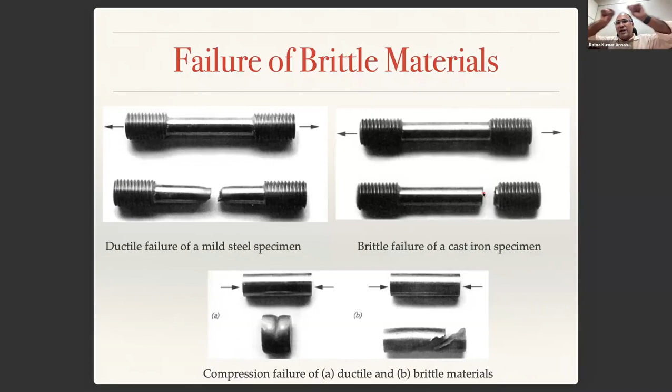That is why if you take a chalk piece — chalk is a brittle material — if you apply a load axially, it breaks normal to the surface. It may break at the center or any point depending on stress concentration; here it broke at a particular point. The idea is that it breaks normal to the surface. Why is it breaking normal to the surface?

Because on that plane you have maximum normal stress — that is the principal stress and the maximum normal stress along the x-axis. Since the normal to that plane is the x-axis, sigma along the x-axis is maximum there, and hence failure happens on that plane, because brittle materials are limited by their normal strength.

Similarly, in compression it behaves differently. We will talk about that later, but focus on this for now.

So we have to understand that brittle materials do not yield, they rather fracture. For brittle material, fracture in tension is only due to normal stress, because failure is completely governed by normal stress — whichever plane has maximum normal stress, that plane is going to break apart.

Because the critical stress is only the normal stress, we need to use the maximum normal stress theory. This theory says that wherever the maximum normal stress reaches the critical value — here the critical value is ultimate strength rather than yield strength — the maximum normal stress theory can be applied for brittle fracture in tension.

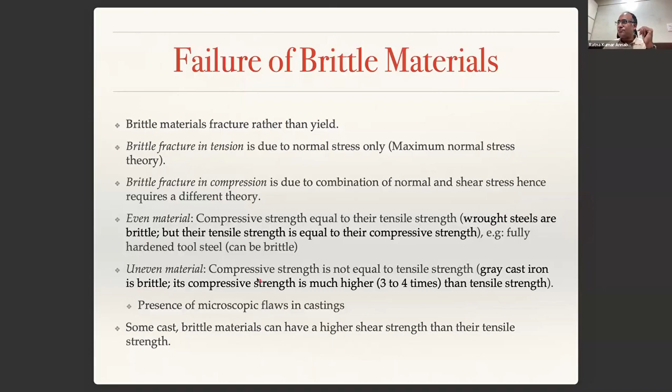This is because in castings you have several microscopic flaws that become fracture points. It's much easier to open up a crack under tension rather than under compression. That is why under compression they have much higher strength. Sometimes some metals also show uneven response in yielding, but let's not worry about that at this point.

Now, for a ductile material, instead of applying tension, if you apply torsion -- that means pure shear -- in the previous case with uniaxial tension, failure happened at an angle of 45 degrees. But with torsion, failure happens normal to the surface. Why would it happen normal to the surface? Because shear stress is maximum there. Since you are applying pure shear, your maximum shear stress is going to be in the same plane. That is why failure happens on the plane of maximum shear stress, because you are applying shear stress and the maximum shear stress is on that same plane.

But brittle materials are governed by their maximum normal stress. So if you apply torsion, the normal stress is going to be maximum at an angle of 45 degrees. If you draw the Mohr circle for pure shear, it will be centered on the origin of the sigma-tau plane, and the maximum normal stress will be at an angle of 90 degrees to the maximum shear stress -- that is 45 degrees in the physical plane. So the normal stress is maximum there, and that is why breakage happens at that angle if you take a brittle material and apply torsion.

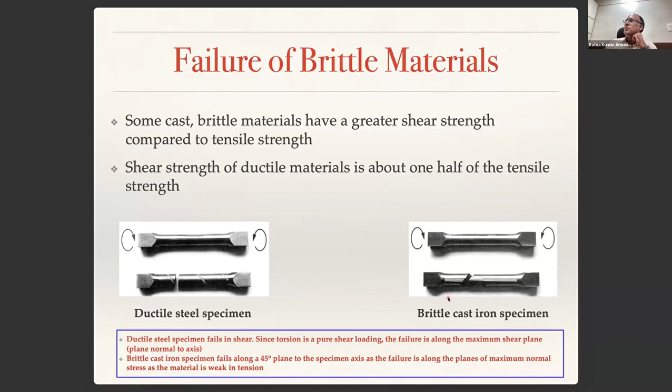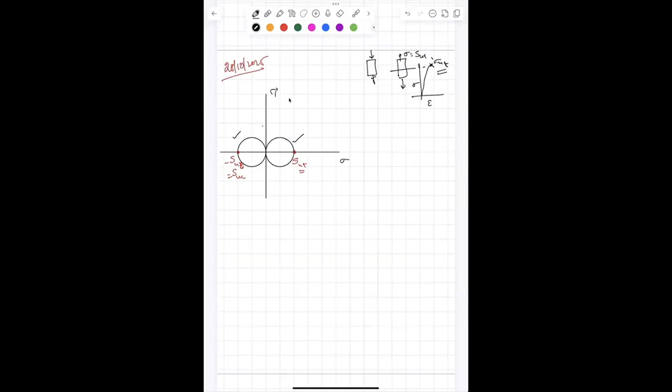Yes sir. Now if I draw a line tangential to these two circles, that is basically a failure line. So this failure line intersects this at tau I. So if I have to write, for an even material, the equation of this failure line, what do I write?

My equation for the failure line will be tau equals tau I, isn't it? When my tau becomes tau I, when my shear stress becomes tau I, that is when failure happens. That is the equation for the failure line. What is the meaning of that? Let us say I have applied on the body a stress of this much.

Sigma, let us say that is sigma UT by 2, that is this value. All of you agree? Then for that particular uniaxial state of tension, what is the Mohr circle? So, or this is maybe my tau max. So what is the tau max value here? Is tau max less than tau I or not in this case?

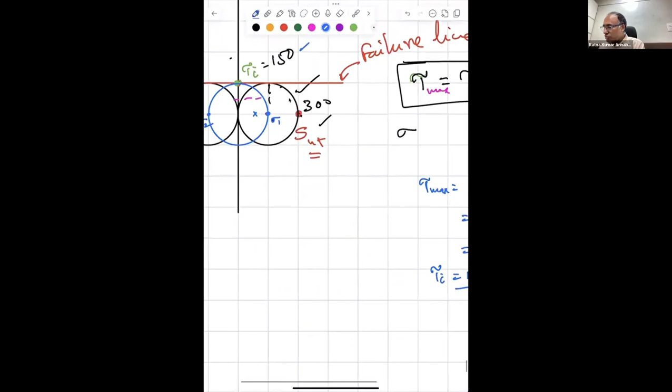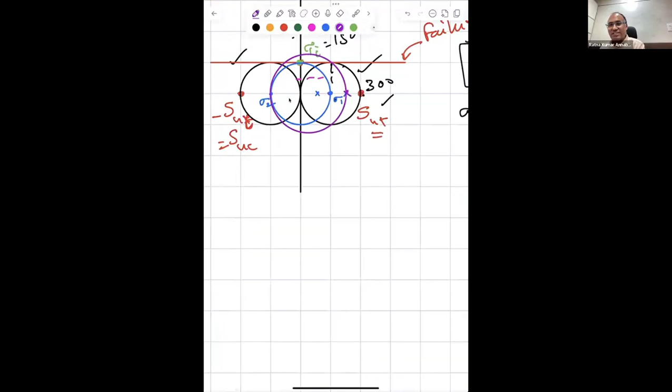So now let us draw these things: 200 and minus 150. Let us say this is 200 and minus 150. Let me draw that particular circle. What happened? The circle went beyond that failure line, isn't it? Yes sir, so that means it has failed, which we were actually able to see from here.

So the point that I am trying to make is, if you identify the failure line, if a material is failing, then the corresponding Mohr circle should become tangent to the failure line at best, or it should not cross the failure line. If it touches the failure line or becomes tangent to it, then the factor of safety is 1, that means it has just failed. But if it is crossing the line, then the factor of safety is less than 1. If it is under the failure line, then the factor of safety is greater than 1.

So now, in the same picture, let us take the scenario of an uneven material. If you have an uneven material whose failure surface is, let us say sigma UT or SUT, and SUC is double that. This is my SUC, that is equal to minus 2 times SUT. In this particular case, it is double.

Now, if I draw the Mohr circle for the uniaxial tension case with SUT, let me draw that again. So that is my uniaxial tension case Mohr circle.

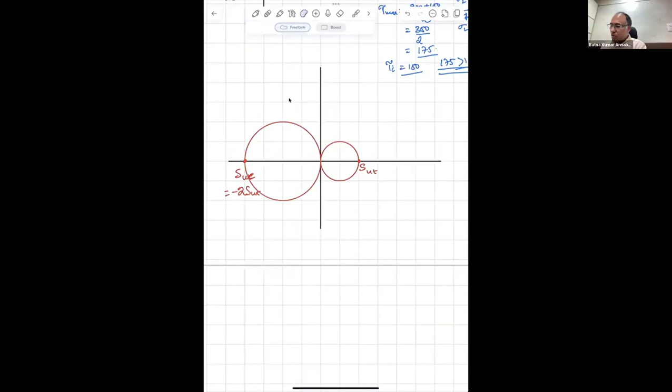Now, how does the failure surface look like? That should be tangent to these two circles, right? So now I need to draw a tangent.

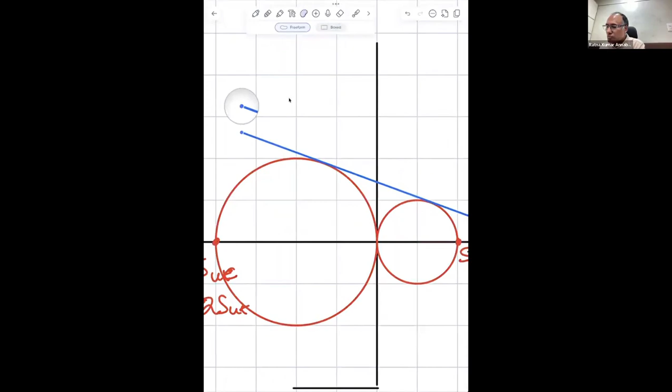Right, I have drawn this tangent, and this tangent intersects at this point. Let me call that tau I. And the slope of this line, I am calling mu. This axis is sigma and that axis is tau.

Now, the equation of this line can be: tau is equal to y, which is tau is y, m is mu, x is sigma, plus y-intercept tau I. So I can write tau is equal to tau I plus mu sigma. That is the equation of this failure surface.

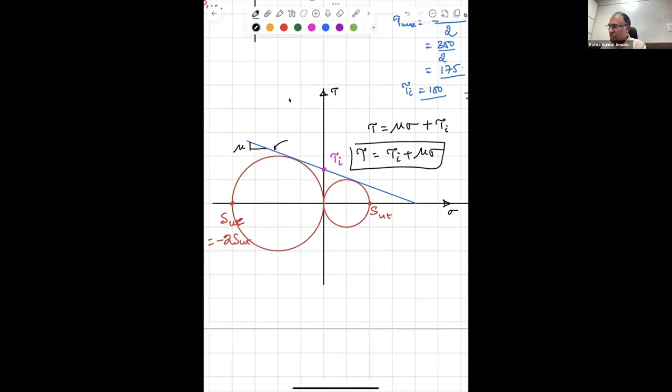Now, whenever you take any stress state, you plug it into this equation, and if the stress state satisfies this equation, then it is failing. If tau is less than tau I plus mu sigma, then it is safe. Otherwise, it is not safe.

Or in other words, if you plot sigma 1 and sigma 2, let us say this is my sigma 1 and that is sigma 2, then if I draw a Mohr circle, and this is inside the failure line, hence it is safe.

But let us say, when will it become unsafe? Let us look at that. Okay, so sigma 1 is same, but let us say sigma 2 is changing.

So when sigma 2 becomes this value, you can see that is when the circle is becoming tangent. So if you have sigma 1, your sigma 2 cannot be greater than this value, because beyond this value, the circle is going to cross the failure line. So given sigma 1, your sigma 2 should be less than this value. Only then the material will be safe, otherwise it is unsafe.

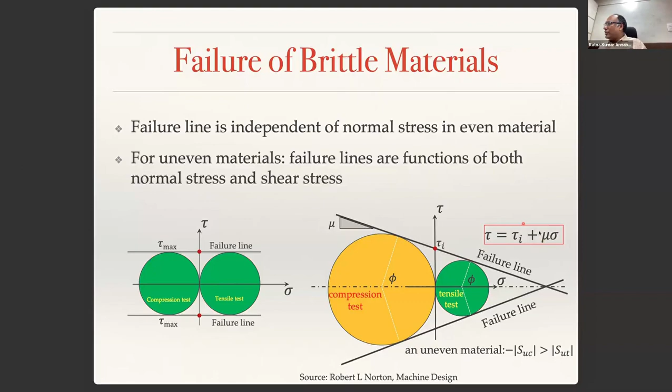So the concept, this is your failure equation or failure theory for brittle surfaces. Typically this is pure tension, uniaxial tension, uniaxial compression, and you can also do a pure shear test. This is pure shear, where you can have the maximum shear stress here. In the case of pure shear, sigma 1 is equal to minus sigma 3. Then you have the Mohr failure line.

Instead of two circles giving a straight line, ideally you should also do a shear test and draw a common curve that is tangent to all three circles. Then it will not be a straight line, it will be a curve, called the failure curve. This failure curve is called the Mohr failure curve, and this is what we call Mohr's hypothesis.

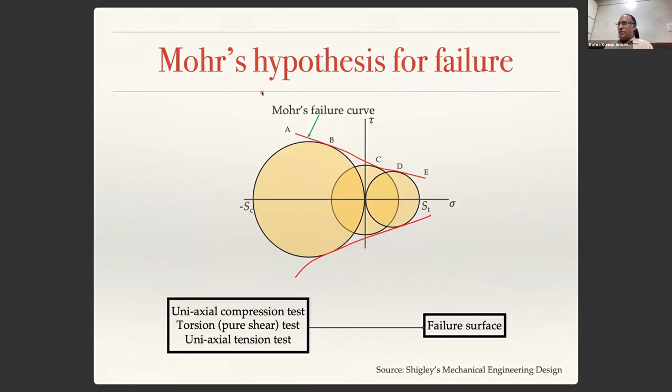So now let us look at the theory for brittle materials. This is what we call Mohr-Coulomb theory. Let us say this is your uniaxial tension circle, and this is your uniaxial compression circle. Any questions there?

Once you have the uniaxial tension circle and uniaxial compression circle, you can draw a Mohr-Coulomb line, or the failure line, and that decides what is my tau and so on. Now if you draw a stress state corresponding to sigma 1 and sigma 3, and the fact that this circle is becoming tangent to this one, that means it is failing, right? So let us look at the stress state corresponding to sigma 1 and sigma 3.

Now let us carefully look at this. I am drawing a tangent to this failure surface for the big circle, and that intersects at C3, which is for the compression circle, and here B1 C1, which is at an angle 90 degrees from the center. B2 C2, C2 is the center of this pink circle. Now you can see that OB1C1, OB2C2, OB3C3 are similar triangles. So when you have similar triangles, you can write this equation: B2C2 minus B1C1 divided by OC2 minus OC1, that must be equal to...

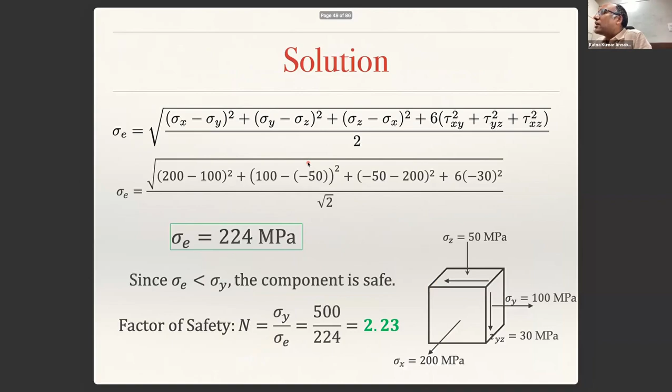The failure line will be parallel. So sigma 1 minus sigma 3, if you look at your maximum shear stress theory, this is what our equation is: sigma 1 minus sigma 3 is equal to sigma y. There we are using ductile material, so we have used yield strength.

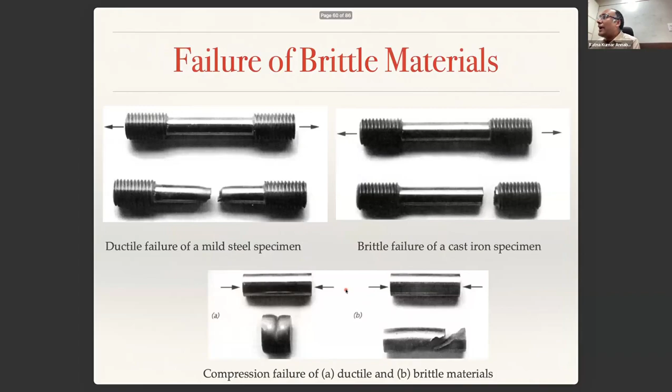But now instead of yield strength, what is showing up there? If it is material even, ultimate strength - ultimate tensile strength. But the equation remains the same, isn't it? Right, sir, sigma 1 minus sigma 3. So there is a similarity between maximum shear stress theory and Mohr-Coulomb theory, except that it is an uneven material, and hence it becomes sigma 1 by ST minus sigma 3 by SC equal to 1.

So what we have done, why we have chosen this pink circle? Because this pink circle is also a failure surface. So when failure happens, this equation will be satisfied. Sigma 1 by ST minus sigma 3 by SC should be less than 1 if the material is safe, or equal to 1 or greater than 1, the material is unsafe. This is what we call Mohr-Coulomb failure theory.

Now, I will not draw this line for you. So ST is ultimate strength in tension, SC is ultimate strength in compression. Now let me, without spending much time, remember how we have drawn our failure surface for maximum shear stress theory, right?

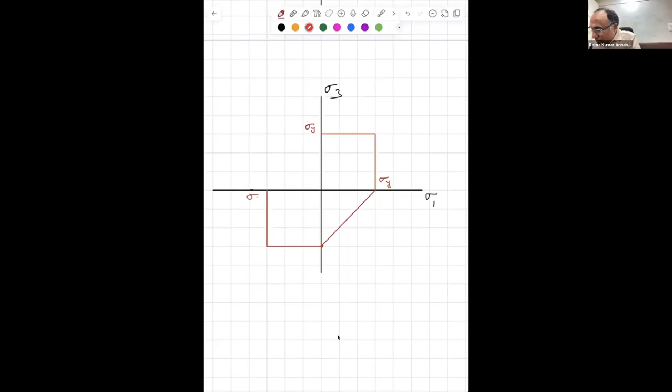For maximum shear stress theory, the way that we have drawn the failure surface is: this is my sigma 1, that is my sigma 3. Now, in the first quadrant, because that is my sigma y and that is my sigma y. 1, 2, 3. And here, this is sigma y. This is how my maximum shear stress theory looked like, right?

This can be written as sigma 1 by sigma y minus sigma 3 by sigma y is equal to 1. Can I do that?

That implies sigma 1 minus sigma 3 is equal to sigma y. That is how we generated this. We have discussed how we got these lines, correct? All of you agree with this or not?

Now what I want to do is sigma 1 by, instead of sigma y, SUT minus sigma 3 by SUC equal to 1. That is what I wanted to deal with. So all I need to do, let us say this is my SUT, this is also my SUT.

But SUC, this one, SUC is greater than SUT. So let us say in the negative direction I have to identify SUC, and this is my SUC. Both of them are normal stresses, no? And this is my SUT.

So now on the compression side, when both are negative, because it is an even material, these bounds are sigma y and sigma y. I have drawn these lines, but now it is a different value. Then I would draw this.

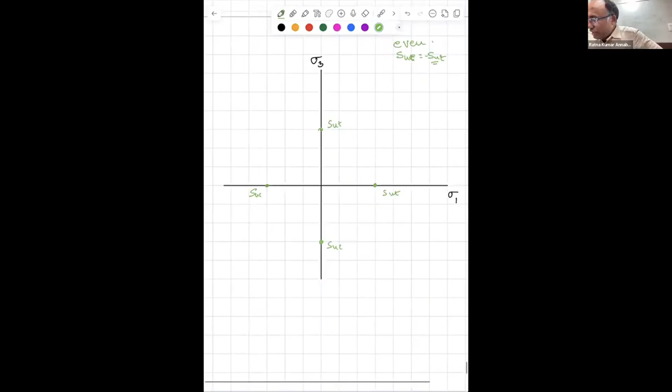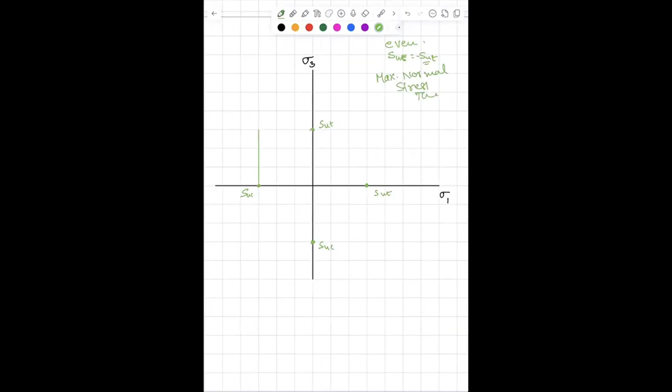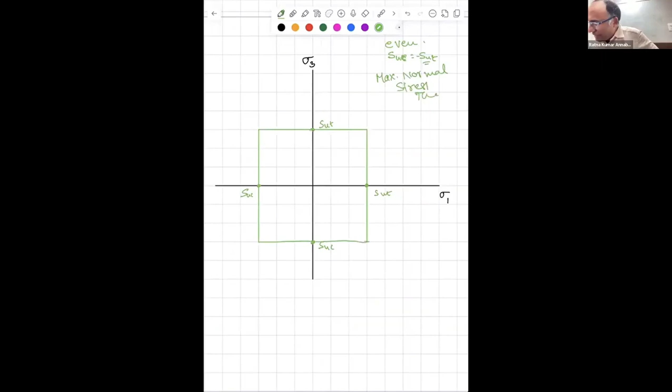So if it is an even material, my maximum normal stress theory - what does normal stress theory say? That the stress difference should not be more than sigma y. So my failure surface will be a square. That is my maximum normal stress theory, isn't it? Yes, sir.

For an even material. For an uneven material, all I need to do is identify my SUC. Let us say that is my SUC - instead of tension this much, but in compression that is my SUC. Then the maximum normal stress theory becomes a rectangle. It will still become a square, but it is shifted - the origin is not anymore the origin. It is an asymmetric square, isn't it?

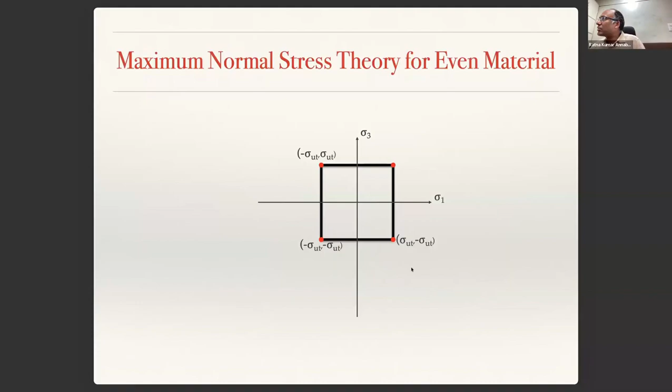So this is your maximum normal stress theory for even material. That will be your maximum normal stress theory for uneven material. And that's your Mohr-Coulomb theory for uneven material. That is modified Mohr-Coulomb.

So this is Mohr-Coulomb for uneven material only. But this pink one here, whatever color that is, it is for modified Mohr-Coulomb because this seems to match with the experimental data better.

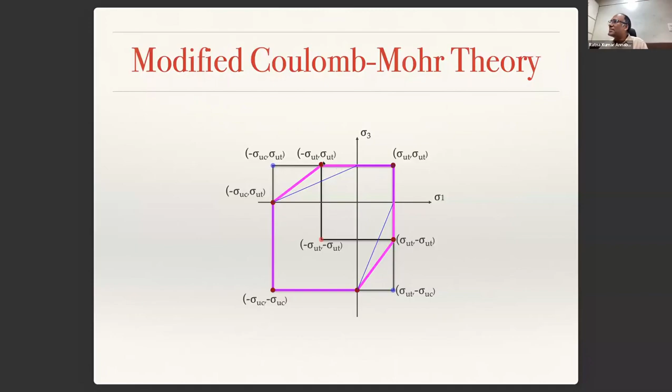So you can see this. This is the experimental data for cast iron, gray cast iron. If you have used Mohr-Coulomb, this is the Mohr-Coulomb line. But the modified Mohr-Coulomb is shown like this.

So since the experimental data is matching better with the modified Mohr-Coulomb, people have said that okay, Mohr-Coulomb is okay because it is going to be more conservative, but in order to save some material, now the suggestion is that instead of using Mohr-Coulomb, you use modified Mohr-Coulomb, which seems to match with the experimental data more closely. That is the reason why the modification is suggested for the Mohr-Coulomb theory.

And hence, the equations that we write for modified Mohr-Coulomb are going to be much more complicated, isn't it? Because you need to break it into saying that, okay, when sigma 3 is less than or equal to minus sigma UT, the failure surface is this. If it is greater than, then the failure surface equation will be this. Earlier one equation was doing that, but now you need to break the equation in this region as well as in this region.

So that makes the mathematical manipulation a little difficult, but otherwise, the idea is to ensure that it is close to the experimental data. Okay, any questions here?

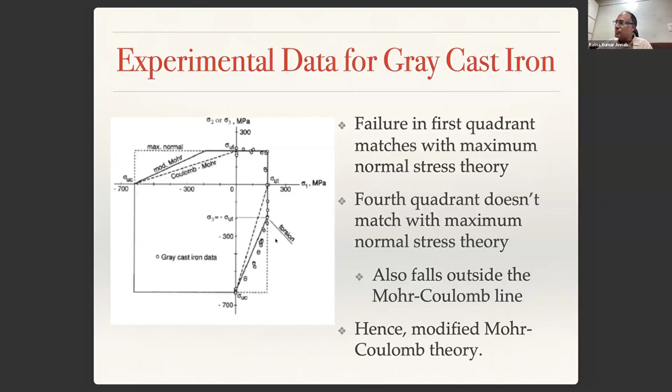So now how do we calculate the factor of safety? Let us say if your state of stress is at point A, then you can draw a line and OA dash by OA will be your factor of safety. Similarly, if the state of stress is at point B, OB dash by OB. If the state of stress is at point C, then OC dash by OC.

And this equation, for example, if you talk about OA dash by OA, let us draw a vertically downward line here. The state of stress at A has some sigma 1 and sigma 3. Now OA dash by OA can be written as this distance from O by the distance from here. Can I do that? Which means OA dash by OA is nothing but sigma UT by sigma 1, whatever is the value of sigma 1 corresponding to this point.

Similarly, here also I can write sigma UT by sigma 1 corresponding to this one. But in this case, you cannot do that. So for OC dash, you need to do a little bit more work.

So in the case of ductile materials, when we are using the von Mises yield criterion, we have something called a factor of safety formula. So now if you want to find out the factor of safety, you can use this formula. And for modified Mohr-Coulomb, you need not worry about the failure surface - if you just plug in the numbers, it will give you the factor of safety accordingly.

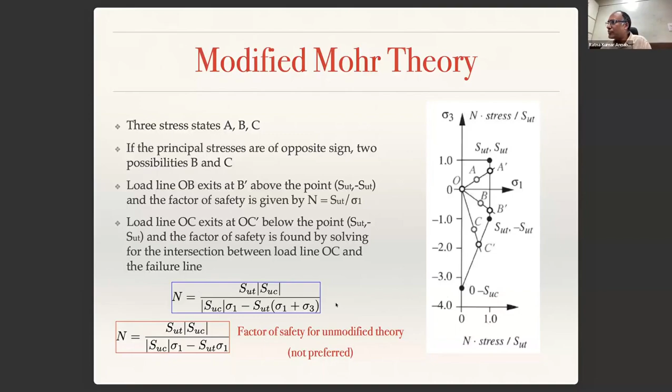However, we have seen in distortion energy theory a very nice thing, right? For an extremely complicated three-dimensional state of stress, you have something called an equivalent stress, which is like a one-dimensional stress, and you are just comparing that equivalent stress with the yield strength of the material to say whether failure is happening or not. Can we do a similar thing even for brittle materials also?

So people, Norman E...

Dowling has come up with this prescription, wherein he said you can come up with something called an effective stress. And when this effective stress becomes equal to the ultimate strength in tension, although the ultimate strength in tension and compression are different, he came up with a prescription where you compute the effective stress and compare it with the ultimate strength in tension. If it is less than that, it is safe. More than that, it is unsafe.

How do you go about getting this effective stress? The effective stress sigma tilde is the maximum value of C1, C2, C3 times sigma 1, sigma 2, sigma 3, where sigma 1, sigma 2, sigma 3 are principal stresses. C1, C2, C3 are computed using SU in tension and SU in compression. If you write a program, the computer can calculate these things, and it is much easier to compute the factor of safety using the ultimate strength divided by the effective stress, similar to the von Mises yield criterion, where the factor of safety is sigma y by sigma equivalent. A similar formula can be used for brittle materials also.

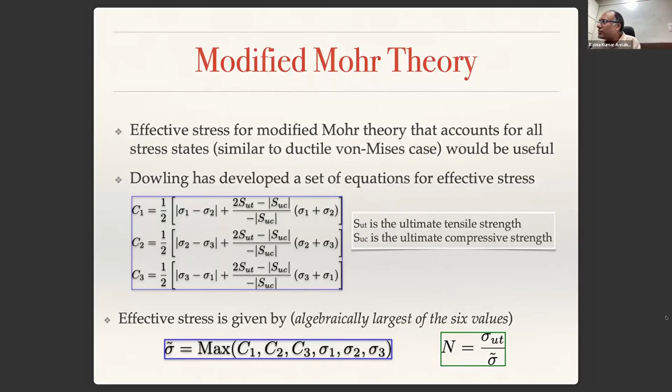Okay, now let's solve this problem then. Don't say yield strength, take this as ultimate strength in tension and ultimate strength in compression, these values.

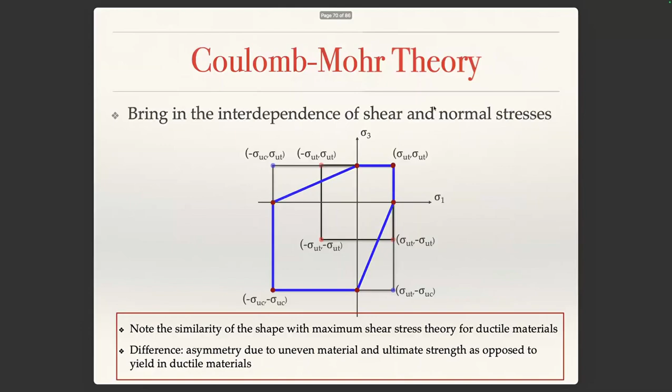Can you repeat, sir, once again please? Sigma 1 divided by ST, yeah, you can see the screen, minus sigma 3 by SC is equal to 1. Okay, cool.

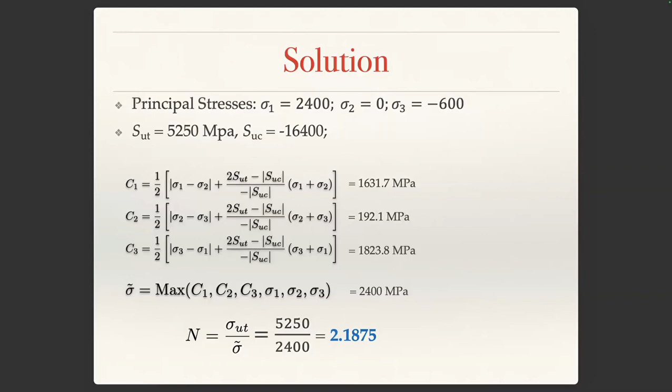Sir, can you explain from the formula how we are getting the factor of safety, sigma 1 by ST minus sigma 3 by SC? The factor of safety formula will be, if it is equal to 1, then this, if this is equal to 1, it is exactly failing, right? Yes, sigma 1 by ST minus sigma 3 by SC equal to 1 means it is exactly failing. So if you want to include factor of safety, it will be in the denominator 1 by n. So the equation will be sigma 1 by ST minus sigma 3 by SC is equal to 1 by n. Then by plugging in these equations, you will get the factor of safety.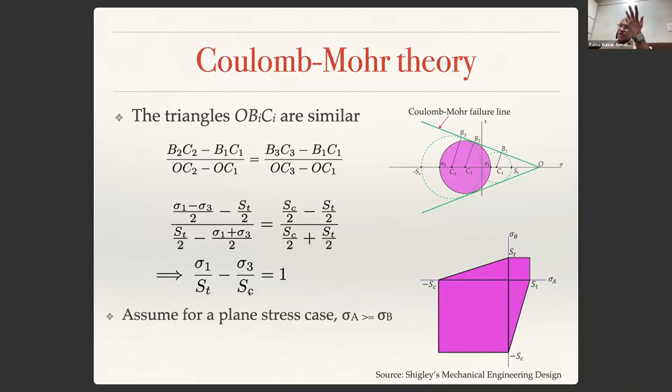You can see that, let us say ST is equal to SC, same, right? I would like you to go through this equation. Sigma 1 minus sigma 3, so the fact tau max is equal to sigma ys, that is when failure happens. Do you agree?

Tau max is when tau max is equal to shear yield strength, that is when failure happens. So the factor of safety will be sigma ys by tau max. Do you agree or not?

Yes, sir, sigma ys by tau max. Tau max is sigma 1 minus sigma 3 by 2. And sigma ys is sigma y by 2.

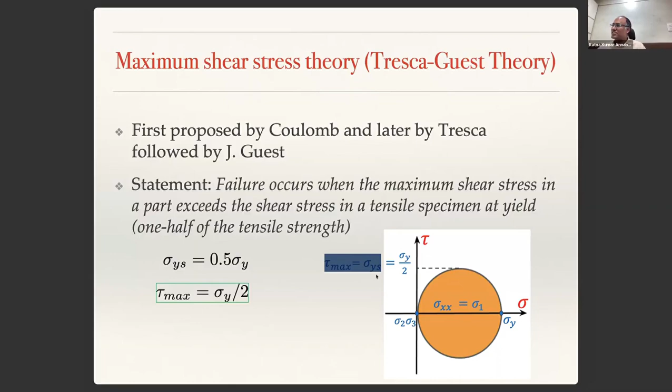So your factor of safety will become sigma y divided by sigma 1 minus sigma 3. Is that clear? Maybe I will write it down, if I don't write it down, maybe it is difficult to follow.

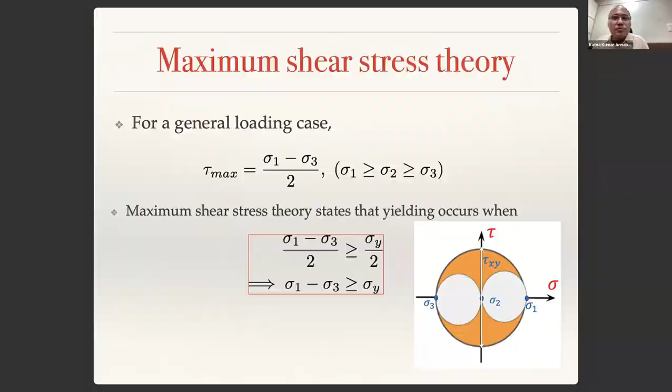Now let us look at the maximum shear stress theory for an even material, forgetting about uneven material. For an even material, the formula is sigma 1 minus sigma 3 is equal to ST. That is the failure criterion, right?

So the factor of safety will become ST by sigma 1 minus sigma 3. Do you agree? Or this can also be written: sigma 1 minus sigma 3 is equal to ST by n, or sigma 1 by ST minus sigma 3 by ST is equal to 1 by n.

Now ST and SC are not the same, so sigma 1 by ST minus sigma 3 by SC is equal to 1 by n. Understood. Okay.

Further, we can bring n to that side and bring all the terms to the denominator of 1. Any which way, but the equation is the same, which is only a rearrangement of numbers. So now your factor of safety will become SC times ST divided by sigma 1 SC minus sigma 3 ST.